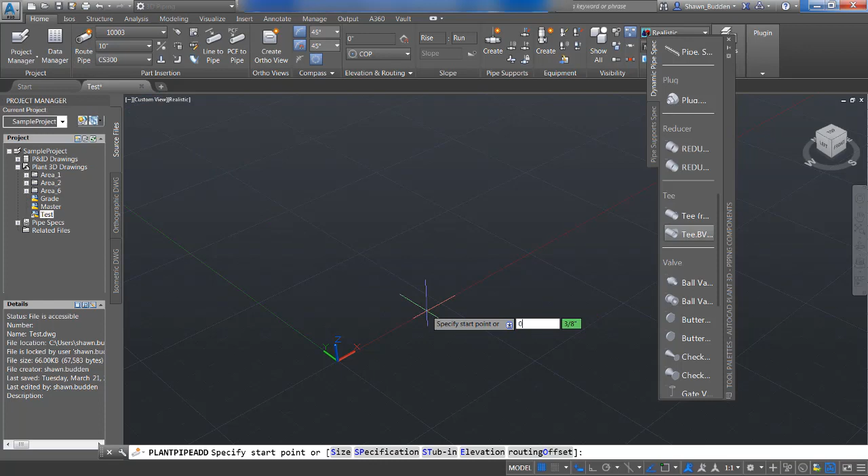So let's go ahead and do a couple of examples of this. We're just going to stick with the center of pipe right here. I want you to notice we have an elevation of 0 feet right there. And I'm going to go ahead and route a piece of this pipe here, selecting 0, 0 as my starting point, and go out 50 feet with a piece of pipe. Okay, nothing out of the ordinary about that in the command.

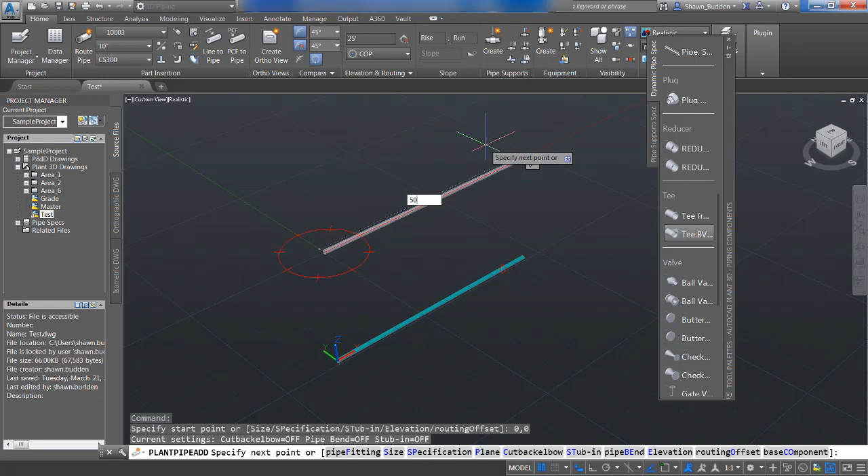We're going to go ahead and change the elevation of the pipe. Let's say that we have a known height of 25 feet in a pipe rack, and we're going to go ahead and route to that height. So let's go ahead in the route pipe, and let's do a 0, 0, starting off in the same place. We'll do the same 50-foot piece of pipe. And now whenever we enter that in, I'll go to a front view so you can see the height difference. Now you'll see that you've done those at 2 separate elevations.

Now another tool that can be extremely useful, especially when you're routing pipe on structures and you need to do an offset, is an offset that we have. So if you go to the elevation and routing panel, if you use this drop down right here, you're going to see that you have a horizontal offset and a vertical offset. I've got this set to 10 feet, big enough so you can see a difference. And what I'm going to do, in lieu of putting some structure there, I'm just going to draw a line with AutoCAD, something that we can snap to fairly easily.

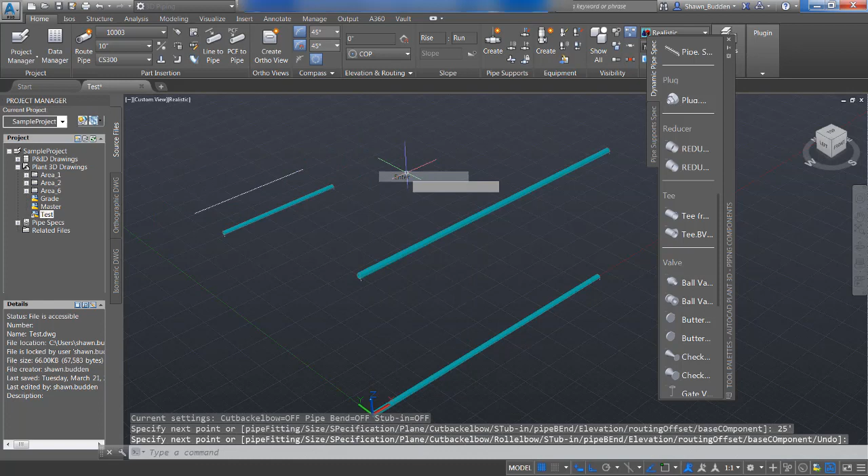I'll go ahead and kick my ortho on and knock that to about 25 feet. There we go, so now we have a line drawn out right here. We're going to use this line as our reference, and I'm going to use a general AutoCAD snap. I'll just start routing the pipe. I will say let's snap to this endpoint, and I'll just give that 25 feet. And now you can see that the pipe was routed 10 feet off to the right from the line that we just drew.

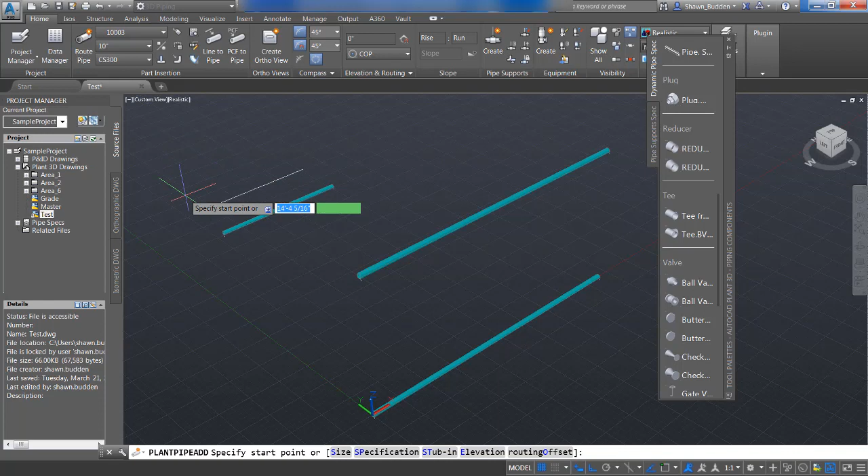Now we can make another edit here and we can say the vertical offset should be 10 feet. And then when we route the pipe, we use the same endpoint. Let's try that one more time. And we'll go ahead and give it another 25 feet of pipe. And now you see that it was routed 10 feet over and 10 feet up.

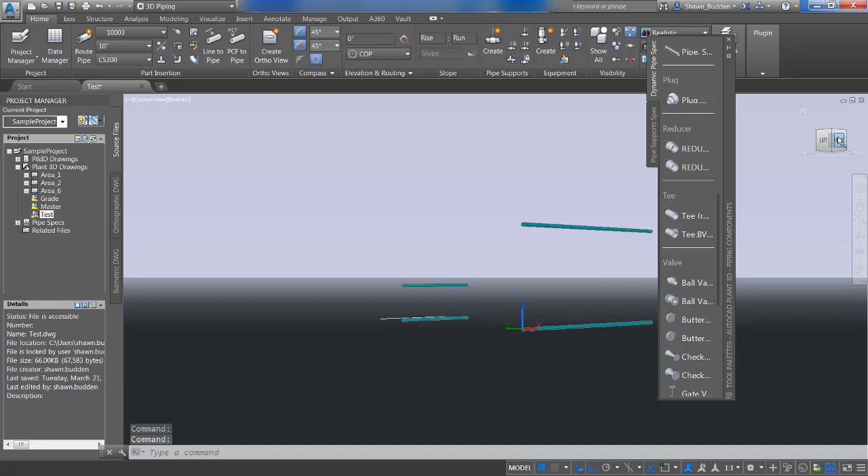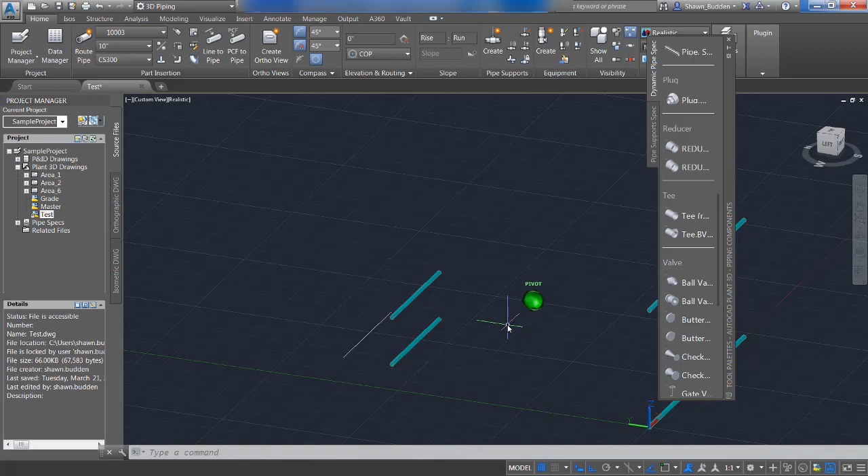We'll take a look at that from the front just so that you can see that. Maybe a parallel view might help you a little bit more. There you go. And if we spin that around just a little bit, you can see that the second piece of pipe is offset vertically as well as horizontally from the line that we drew as a reference. And remember, this would work with a structural piece or any other line that you would have created into your model.